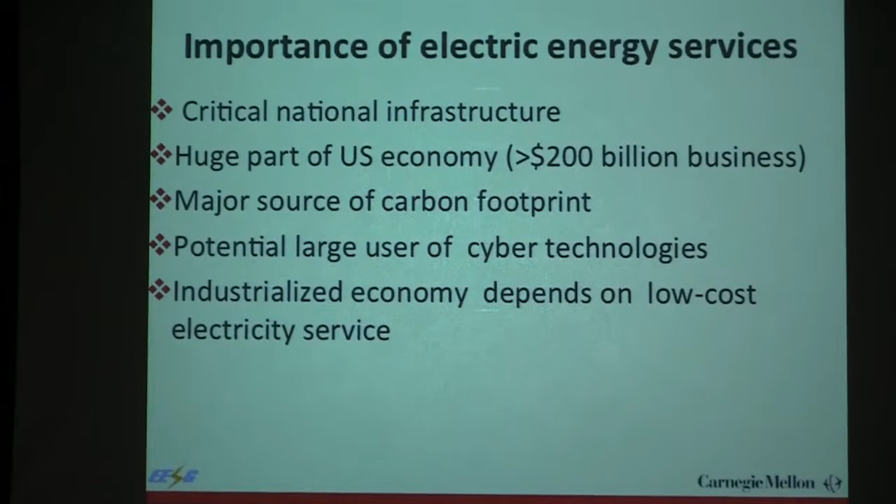So the first thing is it's important to work in power systems, and I'm going to leave some slides. I'm not going to go over them, but I just want for the record to make sure that it really is not an industry to neglect, and it's been neglected for a long time. So what is more interesting is when we were at dinner last night, the professor said, well, what is to change? Everything works. So it's sort of hard to identify what are the things that you can make better.

And so here are some things that, after a lot of thinking, we think need much more improvement. Everybody talks about maybe not as good reliability as we would have, more frequent interruptions. But there is a more interesting thing, which is hidden inefficiency in today's system. When the lights are on, how efficiently you are utilizing what you have. And that's getting to be much more of a problem than in the past.

So there are very well documented studies for a typical utility in a power system interconnection that you can save up to 25% of fuel costs, economic efficiency, if you manage outages in an online way rather than reserves, for example. It's a huge, huge potential saving there. So these are these hidden things that come from using smarts that are hard to explain.

So the other thing is, as you know, more and more for environmental reasons, there is more effort to deploy intermittent resources. And if you don't do it in a smart way, you have to put one-for-one something that balances the system in a fast way. Storage is something expensive, and that doesn't pay off at all, right? So economics are not there. So you have to do it in a smart way so that you deploy renewables and at the same time the cost doesn't go up, and so forth.

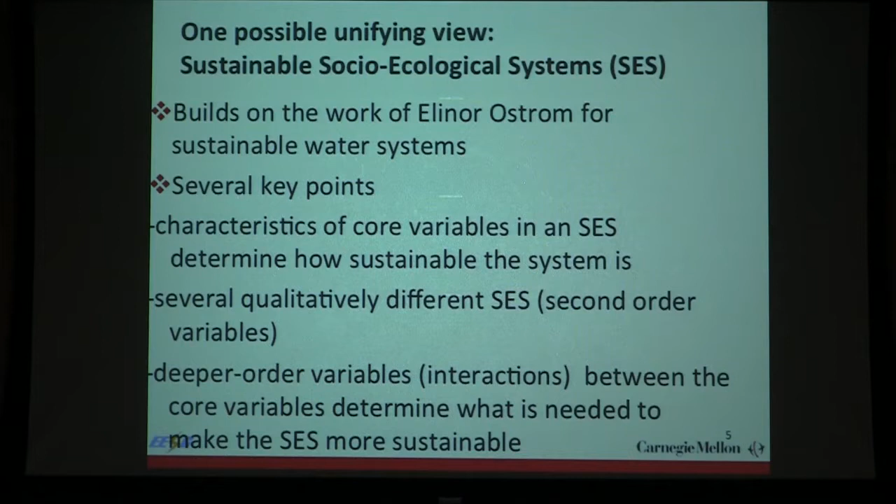What we end up doing, and I think it's one possible unifying thing, is how one could think about the role of cyber-physical systems in the social ecological system. So it's not just the engineering system, it's a social ecological system. You have resources, users, and it's within certain social environments. So is it possible to link sustainability with CPS design? That's really the question that began to help me put things together, and I want to share it with you.

So there are these core variables, which are resources, users, and governance systems. They have their characteristics. They change fast with time, if they're proactive users, whatever. But then there are these deeper level variables. If they don't interact, if they don't work together well, then you have to understand them. And where Elinor stopped in water systems, she really didn't do the mathematical modeling. It was a concept. You look at all these characteristics and you can say how sustainable. You can compare systems for their sustainability.

We wanted to take these for energy systems, we call them SES, social ecological energy systems, as the basis for establishing maybe one possible unifying principle for designing CPS and for energy systems. So what we are talking about here is very simple actually. This is her Nobel Prize winning article in Science. This is the picture. You have resources, resource units, governance system, and users, and the interactions and the outcomes. That's all. This can be a water system, an energy system, water and energy systems together, multiple heterogeneous systems.

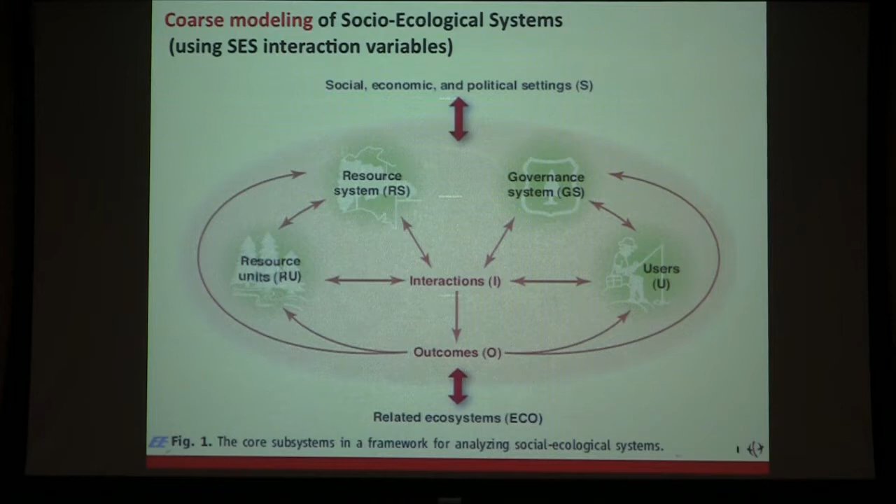And so, going back to the picture again, what we've seen in the fundamental concepts of modeling is very coarse. Actually, it doesn't even exist. There are some tables that say you should watch for those properties of the variables. Now, what does that mean for my future power system?

So these decisions somehow by different owners. So you're not designing the system as one. There are different decision making interacting over time and making the system evolve or perform in real time, better or worse. So how do you go to the classroom and teach these things?

First of all, you have a heterogeneous system. We have energy conversions of different things. We have to do the control design for guaranteed performance and so forth. You really want to bring the system together.

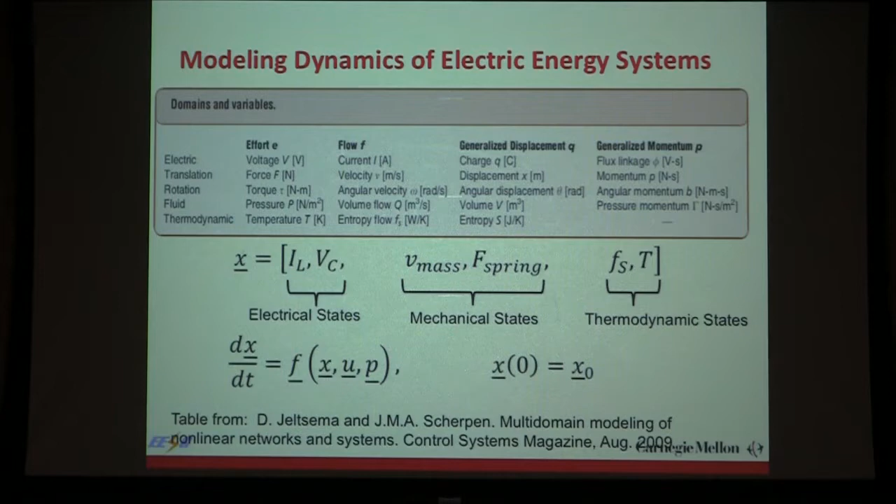This is our take. We want to think about the problem as a nonlinear dynamical system in which there are some states, initial conditions, and the system evolves, and it's being shaped by different control designs. States can be heterogeneous. It depends on how detailed I model the energy conversion in the electrical grid.

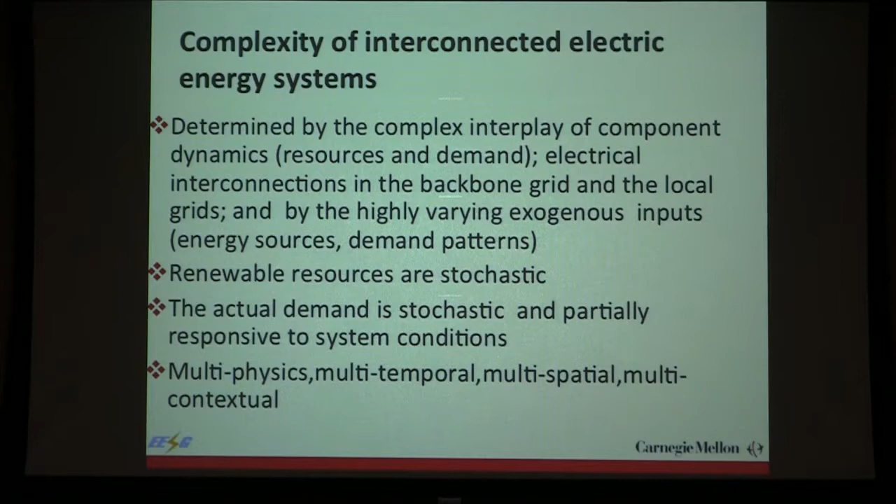So the complexity of the interconnected electric grid is determined by many things, determined by complex interplay of component dynamics, electrical interconnections, and by highly varying exogenous inputs. This is what we didn't have in the past, the intermittent resources and so forth. So you end up having this tough problem where you have multi-physics, multi-temporal, multi-spatial, multi-contextual, and you want to make the system sustainable.

So this is what we've been doing, but this is sort of in hindsight. This is not how we started. We've been doing different pieces of this intelligence, and then a sort of framework evolved. What's clear is that it's not one method, so it has to be a framework.

Given a social ecological energy system, given resources, given the very large system in which I have nuclear plants and far away transmission lines and aggregate loads, passive loads, I need to build one type of wires, and one type of intelligence to align the interactions between them. If nuclear plants have flat output, users better have a lot of adaptive demands so that supply and demand balances. This really helps me, as you'll see as I go to different architectures, put the specs for what I'm designing.

In order to make the case for that, I think what we've seen is at least 5 different types of future electric energy and current grids, going to the question of what's sustainable. Bulk power systems the way it is now, fully regulated, can be the same one, just restructured. Then you have this mix of very large plants, small plants getting on the system, and they're all trying to work together. Then there are microgrids, where I have fully distributed electric systems, and development sustainability is very interesting because it is a different objective for developed country versus developing country.

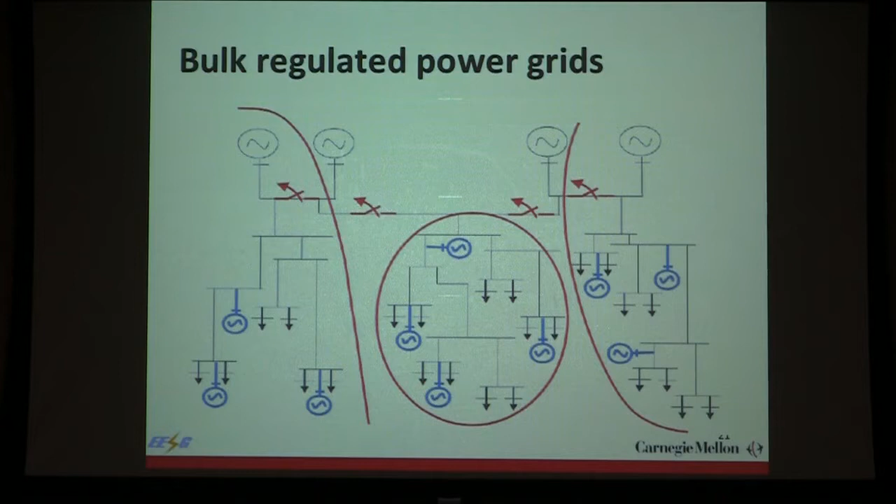Okay, now I want to talk about interactions. Interactions are very, very peculiar. They are interactions across the multi-physics, the intertemporal, the interspatial, and the contextual. Depending on which architecture I'm working on, one is going to dominate the other one. So this is just 101 power systems, very quickly.

So if I have this bulk power system, I can think of the generator connected by wire to the infinite bus - this is an ideal voltage source. The rest of the system is so robust it can absorb anything. It behaves like an ideal source with complex voltage, constant voltage magnitude and 60 Hz frequency. That's the reference. So the simplest translation I tell my students - we are teaching smart grids this semester - this is how I can think if I want to connect my wind power plant to a very large bulk power system. This is how I model the rest of the system. It really is something that is going to stabilize me. There's not going to be an interactions problem. I'll just connect and I'll be fine.

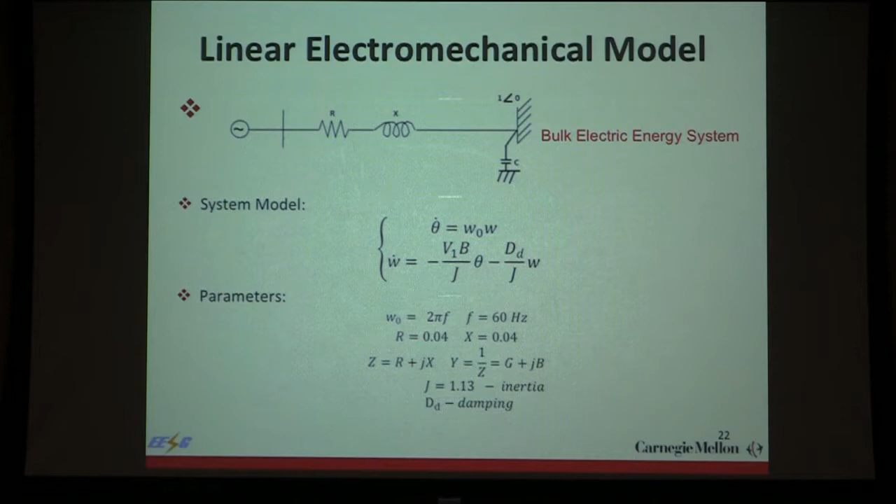So the simplest physics is electromechanical. I think about rotors moving, and this is the dynamics of rotors - speed of the generator and position. If I model this system as an electromechanical model, I don't worry about the magnetics of the generator. Here is where the control comes in.

If I don't have additional damping control - governor is a damping control - then the system, all the variables oscillate all the time, because the energy exchange goes on back and forth between the generator and the infinite bus. If I have good damping, that's the governor, and every generator has a governor control that responds to the deviation of speed from synchronous speed, sooner or later I stabilize. So notice here, if I have an infinite bus, these time scales are important. For this tuning of the governor, I set it to, say, 10 seconds, for example. These are just representative numbers.

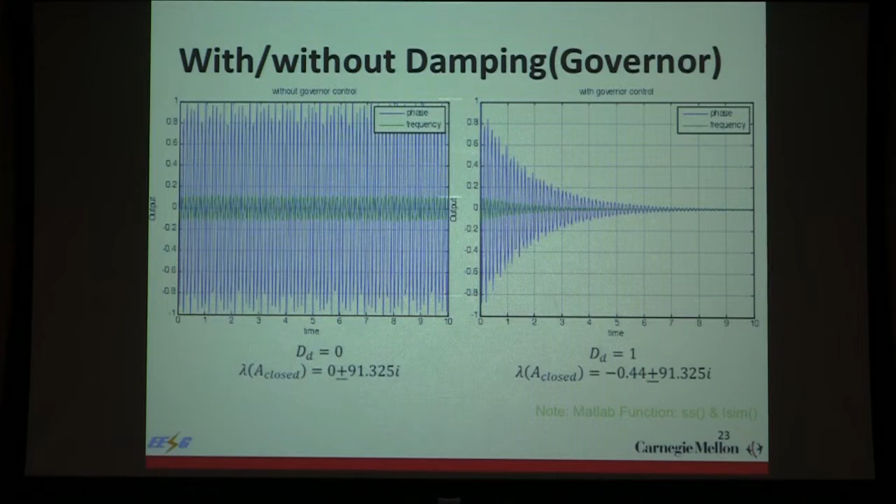Now, this is something, as I'm teaching the course, I just discovered for the first time. If I'm thinking now about connecting the generator to microgrid, well, this is not going to be infinite bus anymore. It's going to, and I have to be very careful how I model the rest of the world.

And if I think about my load as constant impedance, then it's going to be dragging here quite a bit. We don't know these phenomena. These are just new questions because we didn't worry about it.

When you tune wind power plant from GE, you basically tune it against the Thevenin equivalent for stability. Now, depends on what you are connected to, there may be some problems. So this is the relevance of representing the rest of the system.

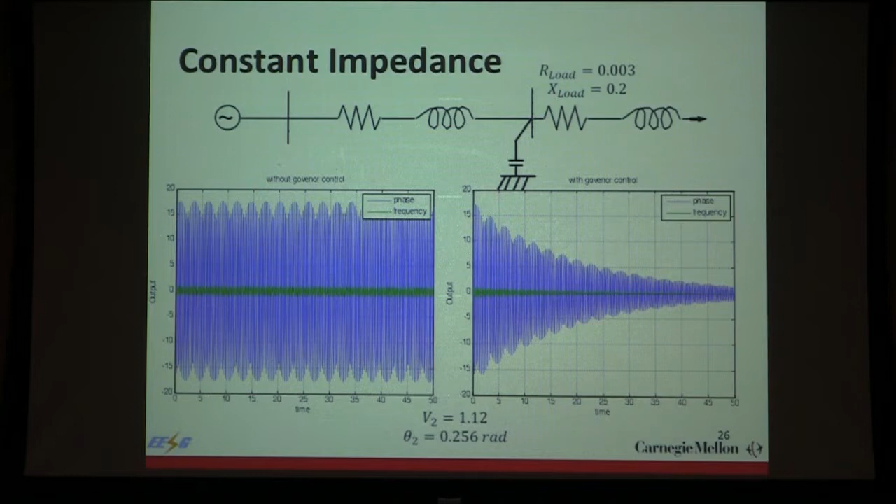Now, on the same thing, I want to just emphasize, goes back to Professor Abed's PhD thesis. If I don't think about my generator just having electromechanical part, but also having magnetic part, voltage dynamics, voltage behind the transient reactance in general, for the generator, if you are into that modeling, we are going to get actually now the nonlinear model because the electromechanical and the magnetics are interacting.

And now I have a controller which is going to control the voltage at the terminal to stay there. That's one controller, field excitation of the rotor winding. And then I'm going to have governor control that's going to control the valve position to put more and less mechanical power to apply to the rotor winding.

So these are two basic controllers, but they're very different. Governor is damping, AVR is controlling voltage, magnitude controlling how much power is sent to the rest of the world. We have to understand the physical roles of these controllers rather than just doing it, because they have very different things.

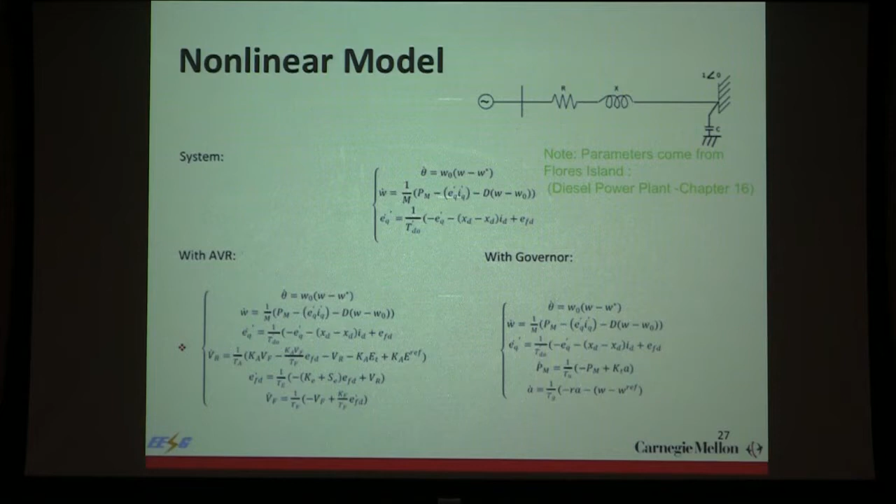So I shared it with my students this semester. If I just represent the electromechanical, I model everything looks stable. So it can be oscillating, I put a damper, it's fine. Now I got into nonlinear dynamics.

I have this cumulative change of a phase angle difference between infinite bus and my generator. Frequency, if you zoom in a little bit more detail, frequency is not quite at 60 hertz. We have the voltage oscillations all the time without control.

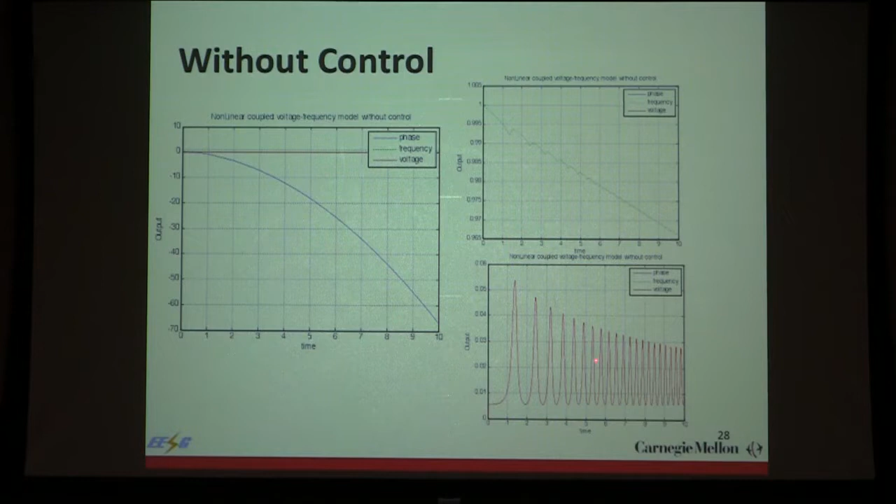So this is really maybe, when it goes to model verification, am I verifying this model or am I verifying the other model? You have to be very careful about what physics I will be verifying. With governor control, I can stabilize it.

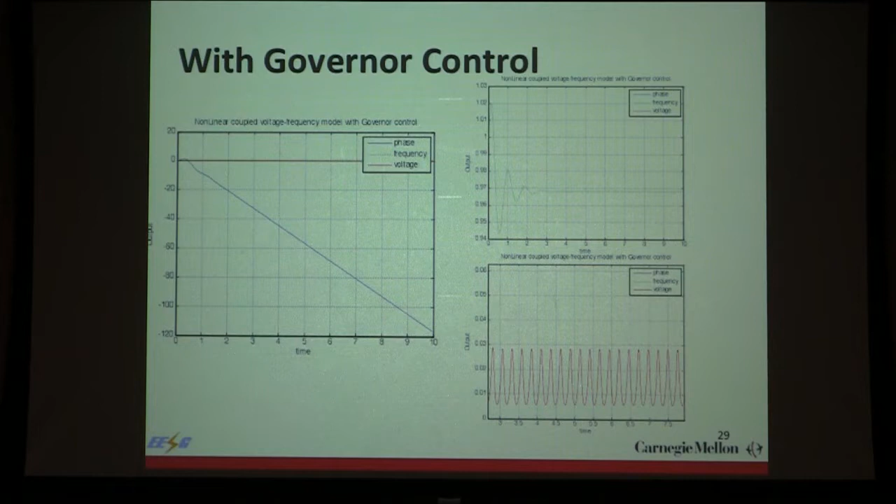And that's another thing here. I can stabilize it, but I still need some coordination to bring the system frequency to 60 hertz. I can be a little bit off, but we'll talk about that some more. With AVR, I get good control. But frequency oscillation happens, I need both. How do I prove it? But I have to understand.

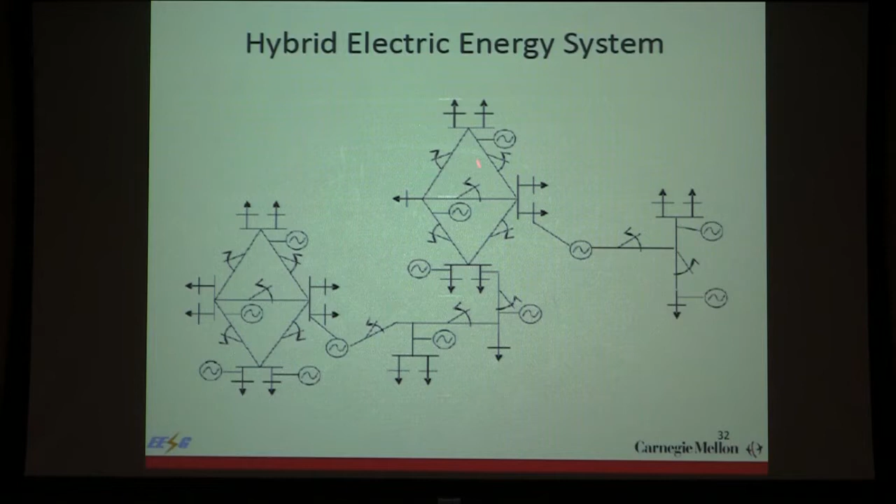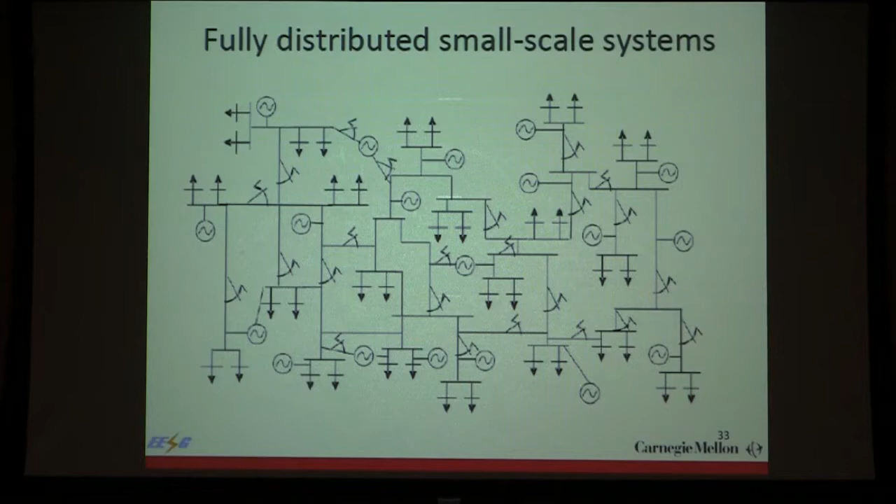So what we have shown in this other architecture, this is hybrid, this is the third architecture that we have there. If I have small resources now and I aggregate them as a portfolio with their own sub-objectives, that's what the sustainability objective will be now, that this is a portfolio with their standards and they are loosely connected to the rest of the system. Or I even have what Fred Schweppe used to talk about, homeostatic control. Everybody regulates itself perfectly, and the system, like the body, regulates itself.

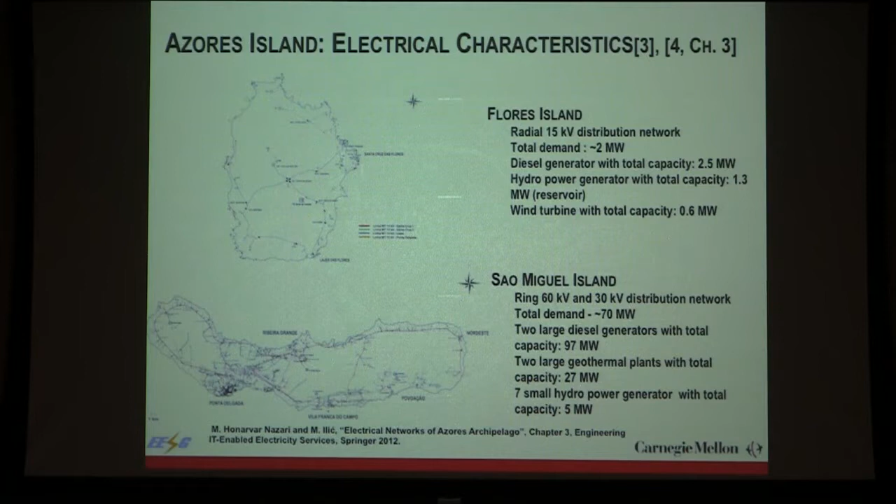Then, if I think about these islands that we simulated, two, one very small, had hydro, geothermal, diesel, and the idea was to replace diesel by wind. That was the whole idea in the book exercise. So what intelligence do you need to put there so that there are no operating problems. And Sao Miguel is a larger island. But let's see the simplest thing.

If we again use, just in the classroom, this small island, we have hydro, diesel, wind. I can model wind as negative load. What comes just gets dumped and scheduled in, and then the other generation is controllable if we need to meet demand. Or I can also control wind. I can get two different approaches.

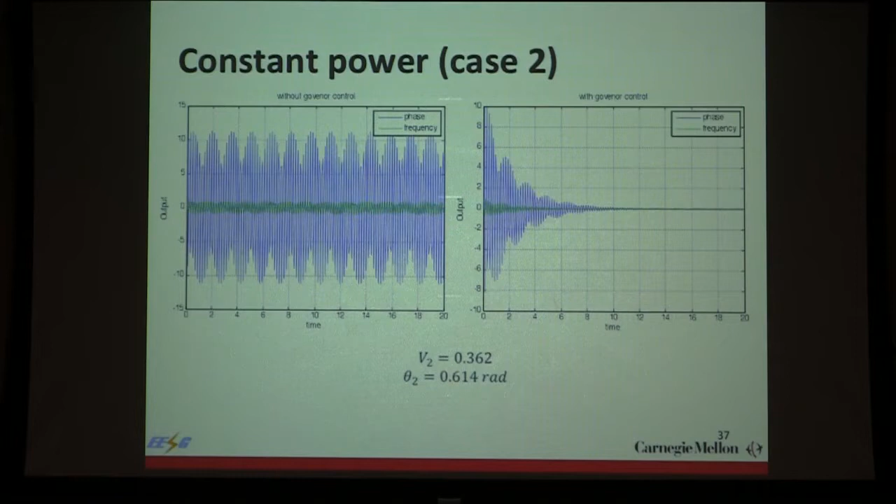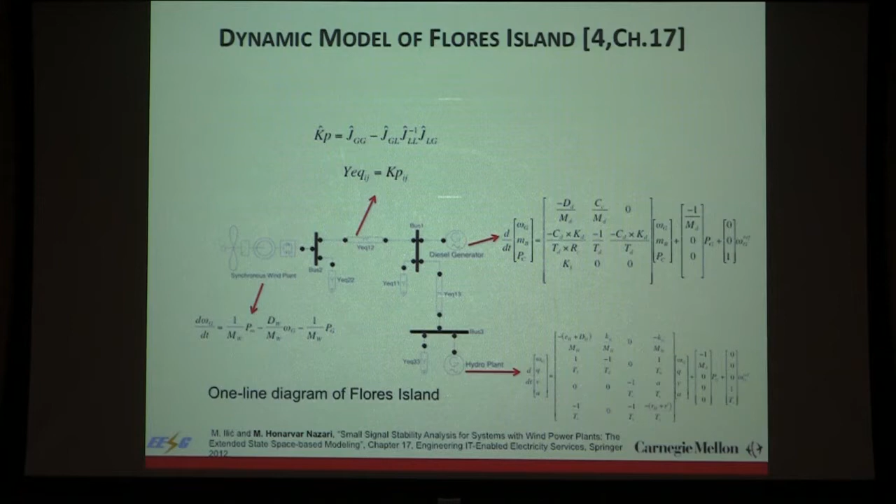Now, this is my microgrid, right? I'm talking about Flores. I do the same experiment. This is with as real data as we can for Flores. This is not even hypothetical data anymore. You have different responses, and this is just a little snapshot from the book where you compress all the loads now as constant impedances, get rid of them, you just have these three power plants, hydro, wind, and diesel, and then you have the dynamics of the mechanical part, and the dynamics of the electromagnetic part, the same way as in the simple example I showed you.

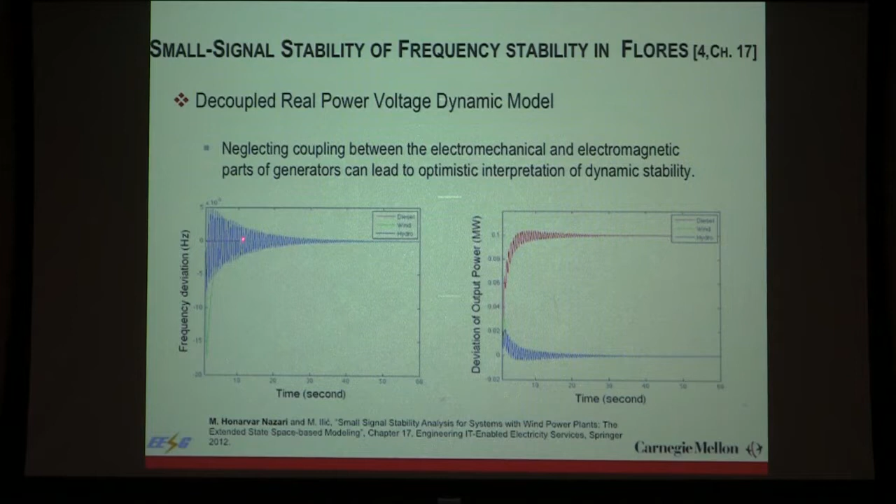Now something really strange happens. If I just do the model, I tune my governor to stabilize frequencies, and then I look at the coupled model, the system goes unstable. Okay, so the question is, what's real? What is mathematical fiction? I think for the first time in power systems, we actually have the opportunity to ask these questions. You can postulate the model and do the parameter identification. You can do different things. So we've done the simulations for these islands, and the next thing would be to actually go and do the experiments to double check data, and so we are getting there.

But this is the first time to say, okay, this is this cross-coupling interaction across physics. So what people do in their optimizations in today's power systems, they say, I assume the ramp rate of the power plant. Well, there's a lot of energy conversion there. A nuclear plant looks different than hydro and so forth. We just replace that by a constant ramping rate. When is it important to have more detail, and when is it not important?

And one thing that is also clear from the studies that we've done so far is that all the details of a very heterogeneous system cannot be done by the system operator. So how much do you internalize? That's the $1 million question. Because I can represent very, very detailed dynamics of my wind power plant, and then give some very simple function or go, no-go intent for the system operator.

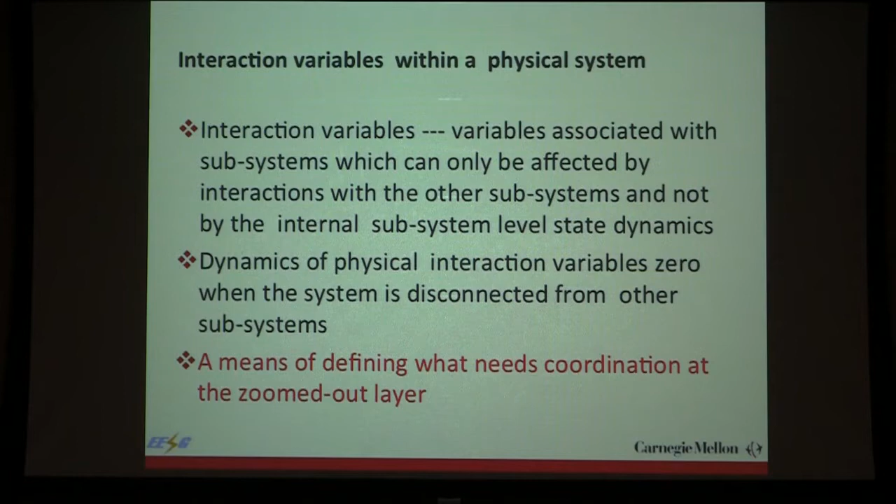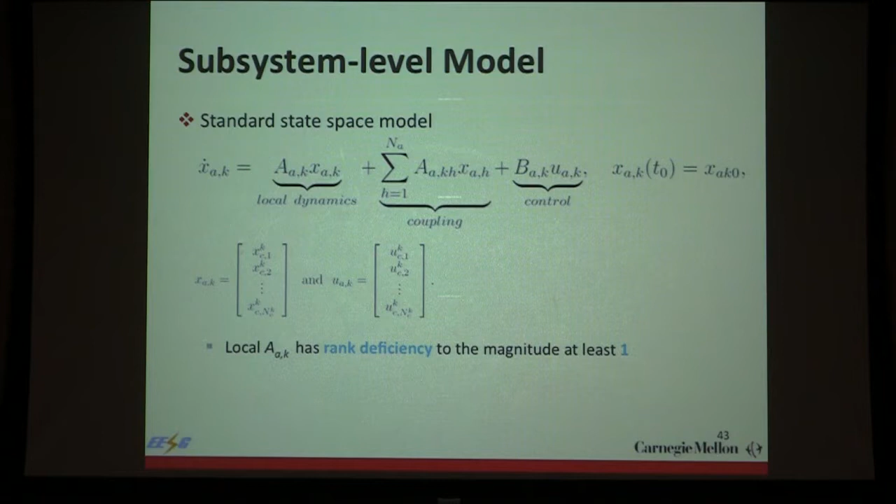We started doing that long ago for AGC or voltage control, but this is the linear version. So there exists such a transformation at the subsystem level, which in the linear case is the linear combination of its own internal states. You don't have to know anything about the rest of the world, so that the interaction variables only depend on the disturbances from the outside world. And so this is the basic thing that's beginning to tell us mathematically what is interaction.

And so this is an important thing because in hierarchical control, in today's power systems, we assume that the fast phenomena is localized and the slow scheduling is global. That is not necessarily true. If I have strongly coupled subsystems, going back to the beginning of the mathematics, just the same equations, now they interact. If I have a weakly coupled system, completely different dynamics. So how does that help me with the specs, with the design? Okay, so I just did the background of what's happening.

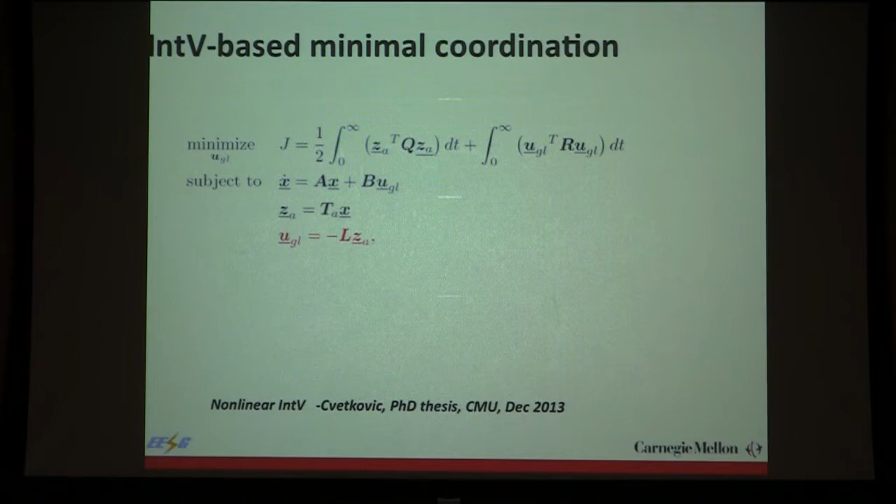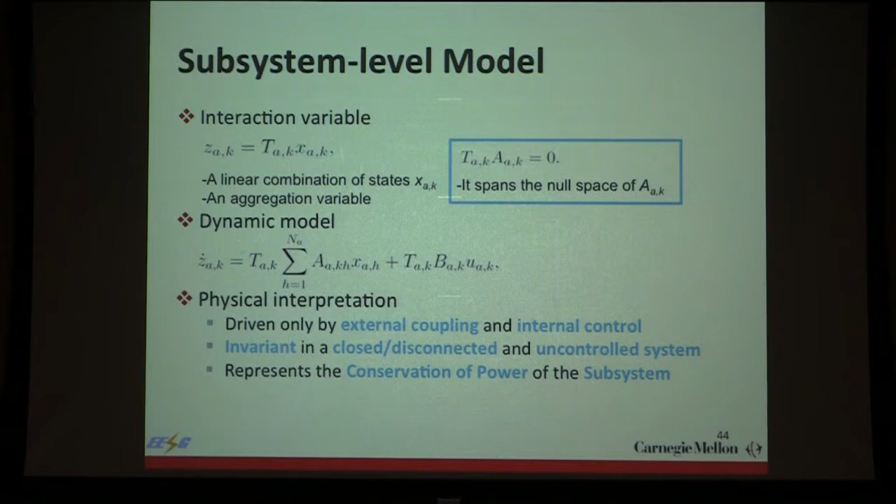So if I go to the linear representation of everything, are these invariants actually? They are unique up to a constant. They're invariant basically. So you start from the dynamic model, I didn't go through all, but you find this transformation. We've been playing with this without actually understanding what we've been doing for a while.

And then what is important now in the context of smarts is, I think this buys you a lot, right? If you do coordination in terms of interaction variables. I'm not going to get there, but if I have,

What exactly is meant by dynamic interaction variables? Am I referring to the time scales? So the interaction variable, let's say I start from time 0 to time t, it's the energy exchange, right? The rate of change of the interaction variable, rate of change of energy, is basically the total net power that comes in. So it has a physical explanation, linear and nonlinear. This is what's meant by dynamic interaction. I don't have to write it just for an equilibrium. I'm just talking about the linear version, but Milos Cvetkovic is doing the nonlinear version, and it actually leads to a lot of nice nonlinear controllers for guaranteed performance.

So, why is this so important? This is important now that I go to some very real life examples: we need to avoid emerging problems, right? So you put a lot of PVs in Germany. You go to West Berlin, there are PVs on all roofs, right? Well, it turned out that the system operator is beginning to see frequency deviations. How are you going to control this one?

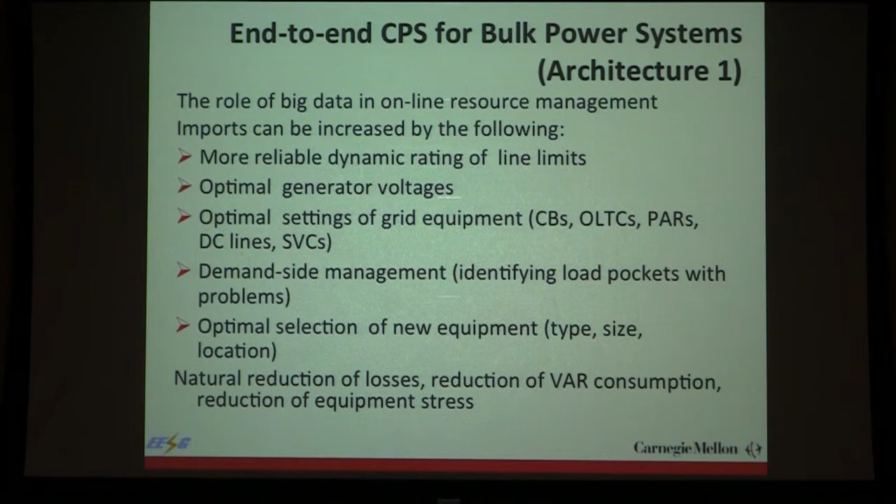And everybody is talking now about online big data, right? Okay, so can you improve anything in the existing systems? All sorts of things. You can do more, better. It boils down, if you go through this, to optimizing the schedules of reactive control devices, in a nutshell, without going to mathematics. And there has been some work also done that if you monitor these interaction variables and control them the right way, you can online actually prevent the blackouts, and that's more involved versions.

So there are things that you can do. If you're fast. Yes. Well, so if you are fast enough, that was the comment. If you look through the list of contingencies that utilities now have, I would say 90% of them are not time critical. 99% of them are not critical. So you need to understand a little bit the dynamics of what's time critical, what's not. And one thing that's a real catch-22 is that what's time critical may not become time critical once I embed smart automation.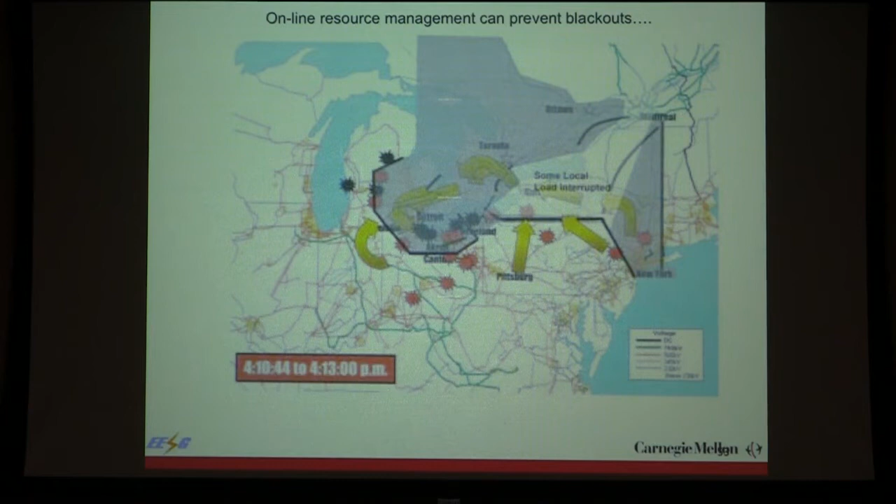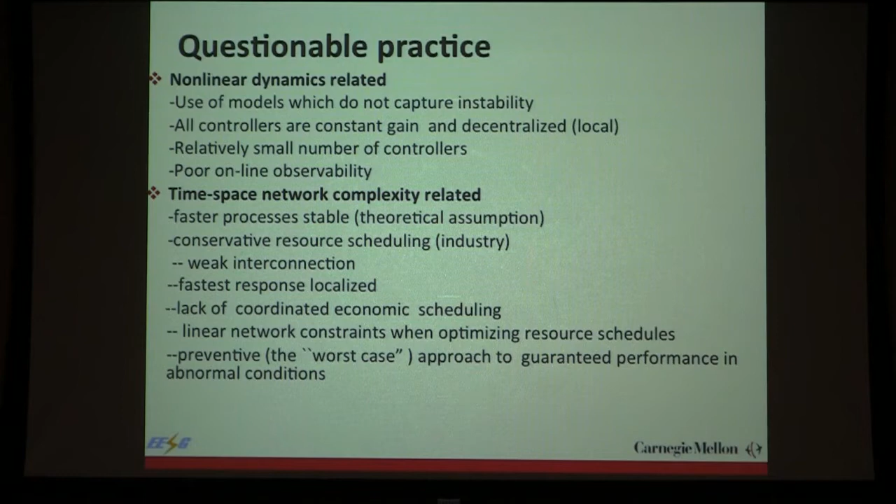So we have to tackle it from different sides. All sorts of issues in today's operation, the assumptions made and so forth, I'm not going there. So I want to talk about what is possibly the next step in power systems architecture. The general thing is going from single top-down coordinating management to multi-directional, multi-layered interactive IT exchange. I will put some pictures. So that's what we call DYMONDS.

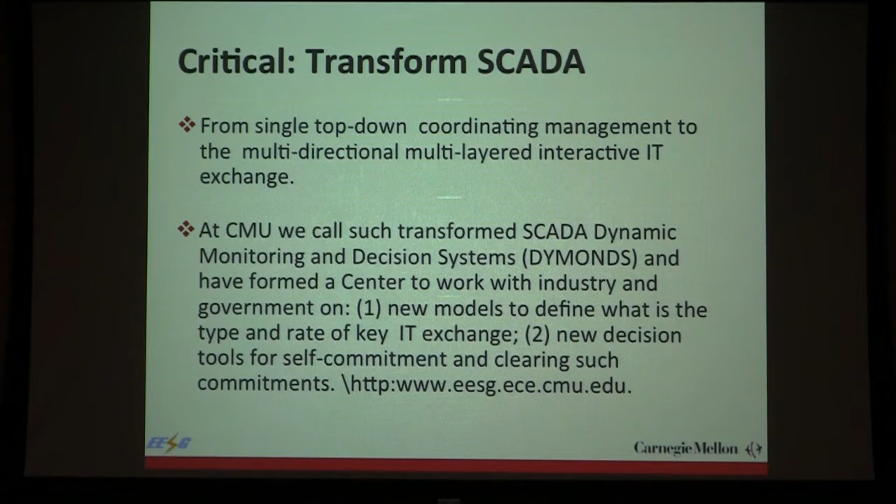So in order to answer this question, we need new models, new decision tools for self-commitment and clearing such commitments, etc. So different time scales, different things. And different students have been working on that. So now this goes to communications. What do people know in real time now? This is the large control center at the bulk level; they measure down to the sub-transmission level, which is, let's say, 69 kV. And that information gets processed here. They never know what's happening in the distribution networks. That's how it's being done now.

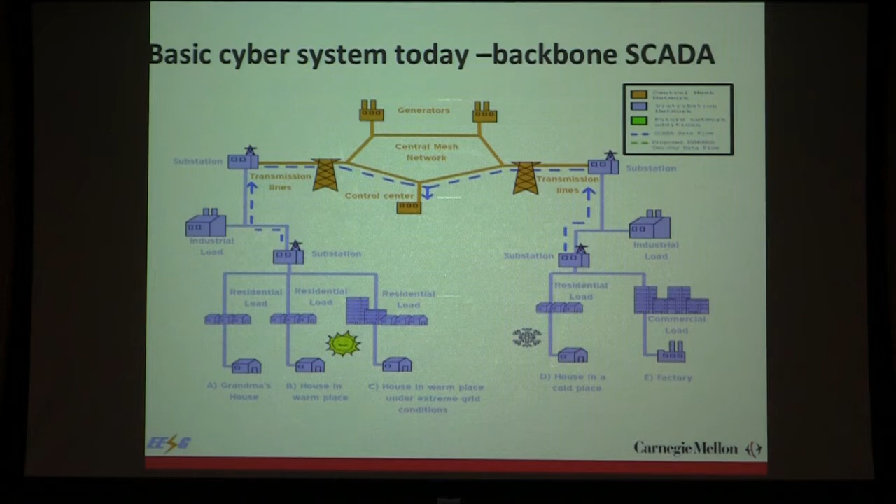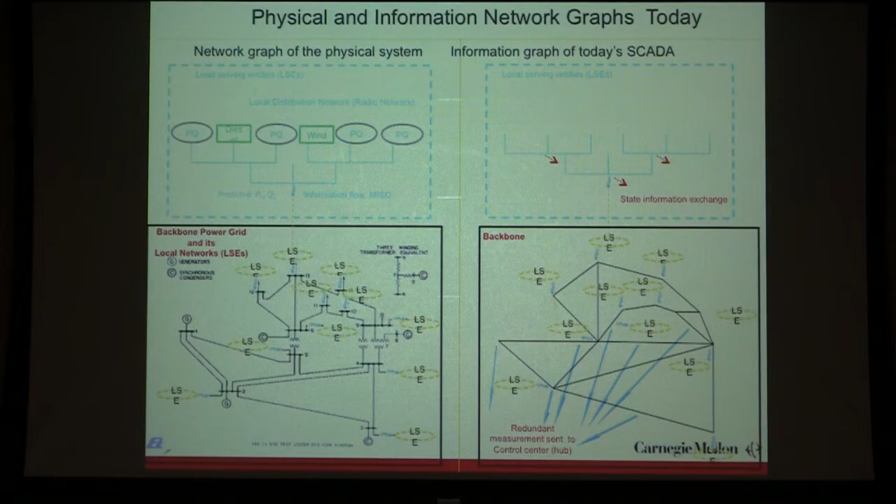There's a lot of effort now with smart grids to put more smart communications. But that's still very disconnected. So if you think about this in terms of information graphs, basically there's a lot of information going from 69 kV there, nothing inside there, and nothing back, right? That's the bottom line. Yang Wang is working with Rohit Negi on a PhD on that. So now, why may this not work? Because all these smarts are closer to the distribution level.

So what we are advocating is evolving into a formalized framework to have physics-based modeling and local nonlinear stabilizing control, new controllers for storage, for demand, etc., new sensors to improve observability. If you embed controllers into these new devices, you have much more controllability and observability for the first time. And then use the interaction-variable-based modeling approach to manage complexity. So that's the basic idea. And it goes over different time scales.

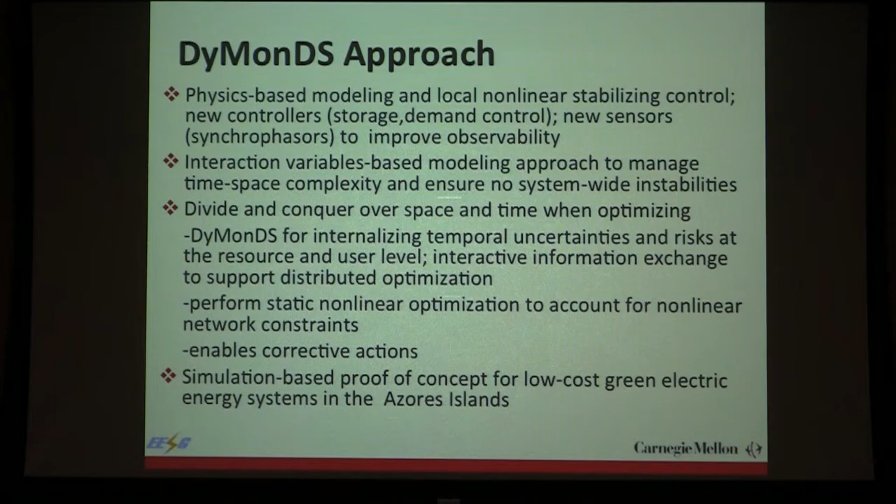So what does that mean? This is one PhD thesis: the guy is working on clusters of electric vehicles. How smart charging you have to have, what information needs to be exchanged with the others, on which time scale. It all comes together nicely. And this is our picture. You put DYMONDS of different kinds, and DYMONDS offer information exchange. It's very simple. Going from not having embedded intelligence in system users to having it all.

Now, what is the problem with going forward in power systems? The problem is, we learned it the very hard way, that state estimators just basically don't work. In a nutshell, the state estimator today is that the system operator collects redundant data about the loads and generators down to 69 kV. So it's a snapshot. For the next hour it's going to be that much.

I do least squares estimation. That's it. But that's a snapshot. Static least squares estimation. Get what the state is, voltage and angle. Forget about it. Restart again. And that is basically the law of the land in the power industry.

So there are problems. First of all, it's nonlinear when you add reactive power, and historical data are not really used at all. And there is this daunting question of how to include PMUs. Where do you put them to actually improve the state estimator? Okay. So these are some things that Yang Wang is working on. I put the details because it has a lot of methods here. Each box is a different method.

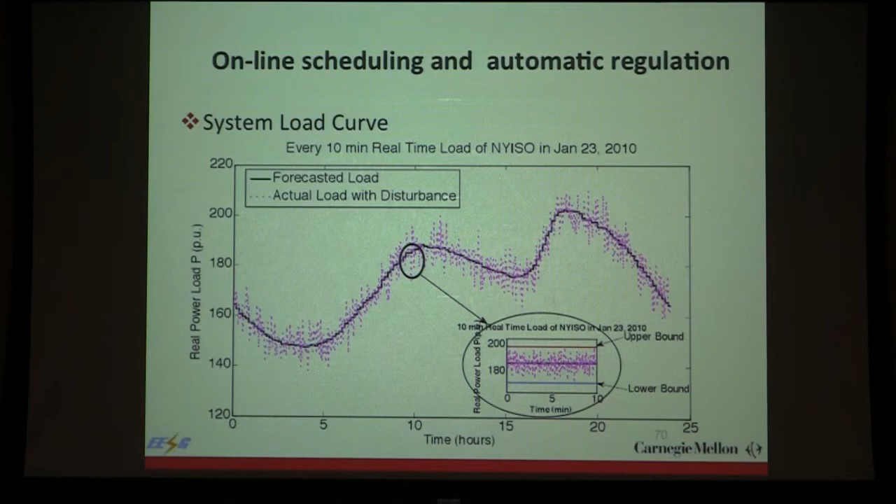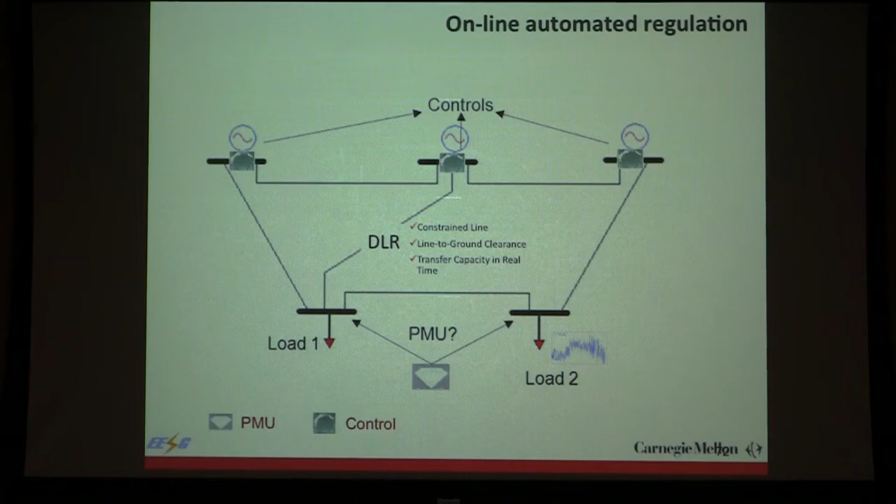So there is all sorts of stuff that PMUs can be doing, and this is again in the context of demand variations in real time and what you do. Scheduling depends on what time scale you are in, but this is where we are maybe going. So you have these perturbations, you put PMUs, dynamic line rating. This is your online automated regulation for things that I cannot predict. Scheduling is different from the predictable component. So there are all sorts of open questions here that I'm not going to go through. We have done some earlier work with...

Do you have enough data now to produce, for this one it's a no-brainer, to use learning to model it? So the learning, I think this is why these DYMONDS and distributed object-oriented stuff is interesting, because at the distributed level you can do it. At the system level you cannot do it. I just don't see how you can do it at the system level.

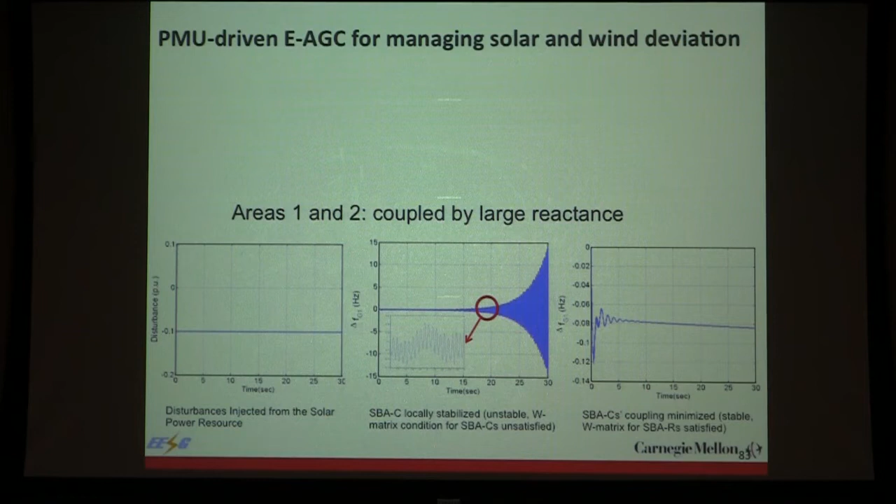But an interesting thing is this is pushing the envelope. Can you actually have these very fast deviations, solar or wind, being held by something else in another area? If I have hydro here, can you even talk across the sub-areas at the fast time scale? Because regulation is no longer a steady-state concept. The wind power is almost stochastic continuous. So you can do it, and again, you have to be very careful about what's interacting in a strong or weak way, not to have some very fast subsynchronous interactions and so forth.

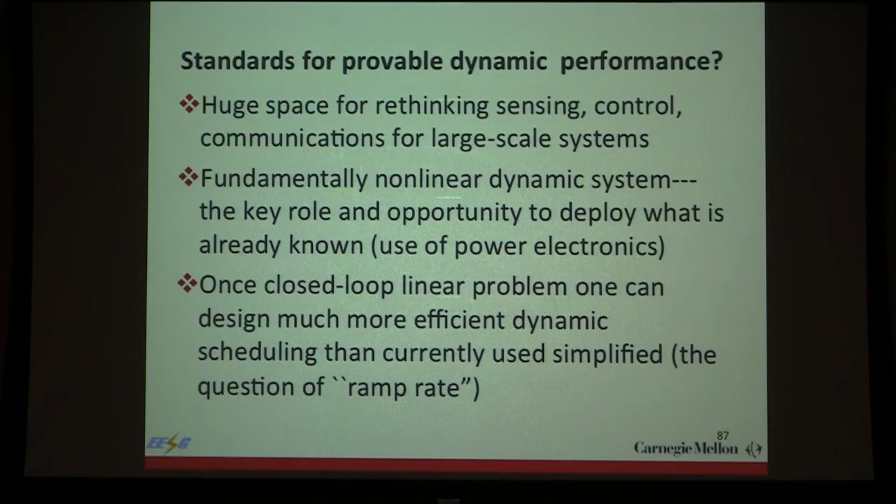So it boils down to, can I have standards for provable performance? It's a huge space for rethinking things, and I don't think that I have time to do that one, so I just want to go to one. How confident are you that all these linearizations, linear models that I've seen, that are used widely, are actually valid? So that is only with new measurements now we can say something. We don't know answers yet, that's the next step. So we've just done simulations.

I just want to show you in 5 minutes a completely different thing here that we are very proud of. This was at the beginning, right? Just 3 more minutes. Thank you, Reza.

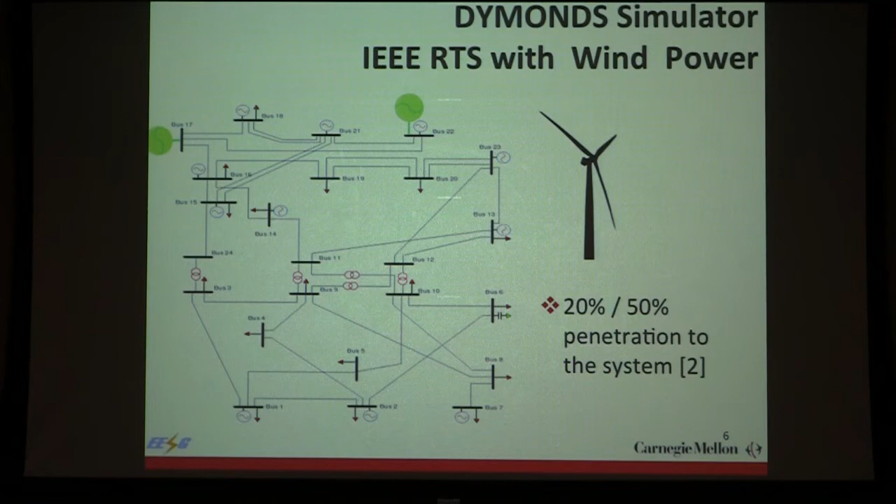Yeah, so this is the simulator for scheduling. It's not even for regulation, right? I predict the wind, I have the model predictive models for maximum power, and can I replace basically these conventional dirty plants with this - this was Le Xie's PhD thesis, he's at Texas now. So can I put 20%, 50% wind, and not get problems? Very interesting things come out, and this is more of an issue of really the smarts affecting and having data affecting what you can do. So if you just treat wind as a negative load, right, this is going to be a negative load.

Yes. So if you just do static dispatch, as I said, you have one snapshot, you follow basically this wind goes up, you predict it's going to go up, the very fast plant has to go up. So you have to get this 1-for-1. This is what's very expensive. Now if I do model predictive control, I smooth out things, I predict. And I didn't have time to go to the math of that, but it's very well documented in the papers we published. So basically, it doesn't pay off to use all the wind. You either spill it or store it. And that's a very hard policy question, but it has savings on gas. I don't have to build a very fast responding plant for it.

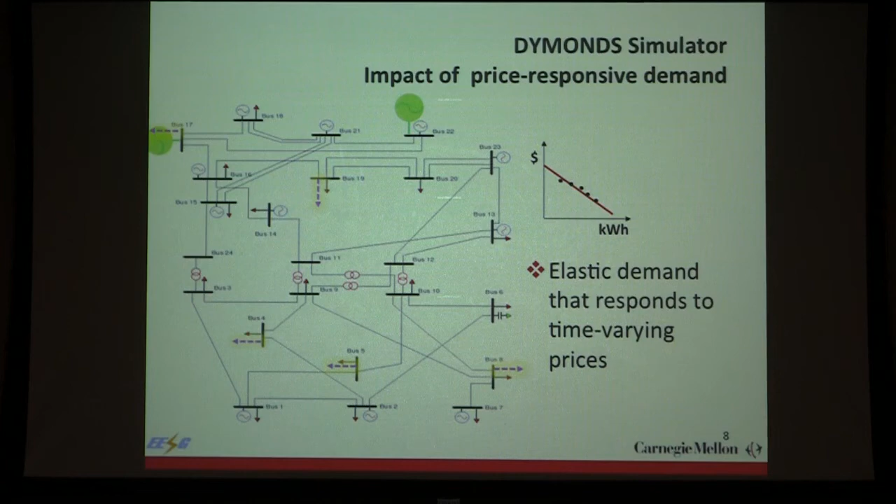So his demand becomes adaptive, and now this net load, which was inelastic, is going to come down as the wind doesn't blow. So I don't have to have a spike in gas. You can smooth it out. So demand has to be managed in a symmetric way.

There are all sorts of questions. Does one trust that the demand will do so, and so forth? So it's a question of protocols and the language and communicating, but it's doable.

And then electric vehicles the same, they are demand. So you can either end up with this very high charging spike for when you have a lot of electric vehicles, or you can spread them around in a more predictive way and do well.

There'll be some papers where they describe this adaptive pricing using this predictive approach. Does a lot of people do the same? So is that somehow... this is an excellent question.

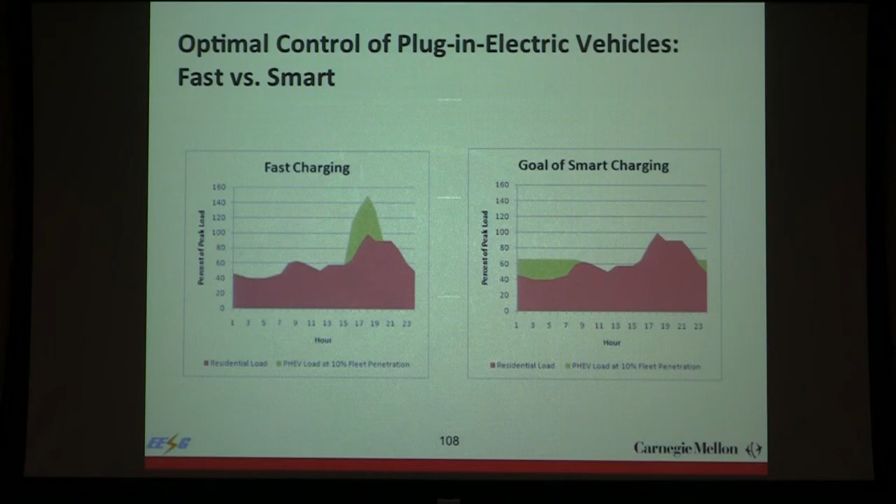So the thing is that I talked to Mardavij, for example, about it. If you do it without a model predictive way, you're going to get instabilities. But model predictive is always, yes, you're going to capture it. So you have to do it in a smart way. It's not a unique answer, but I think the whole point is that you have to be very careful about what you are after.

Just to finish, it's really a huge opportunity, but very likely won't be explored, given the industry and whatever. I didn't have time to talk about privacy, but I just want to make one comment: the more you internalize at the distributed level, the more private you can be.

And so there is work going on on that. This is the one that I'm spending a lot of time on, and we have time to talk about.

Value, in particular of cyber, is system dependent, right? I don't put responsibility for everything, or put 20% to solve environmental things. I have to be very careful. So capacity-based thinking in planning and system design doesn't apply here very well.

So we need to work more on value flexibility, just in time, just in place and context. And they all have their value. This is where we are now, and actually stuck.

Because we finished these demonstrations or simulations showing that it's possible to have these CPS paradigms, proof of concept. Now what is needed is to develop user-friendly simulators to educate what this means, so that we don't just talk to ourselves, and to educate people who are decision makers and people who want to adapt this.